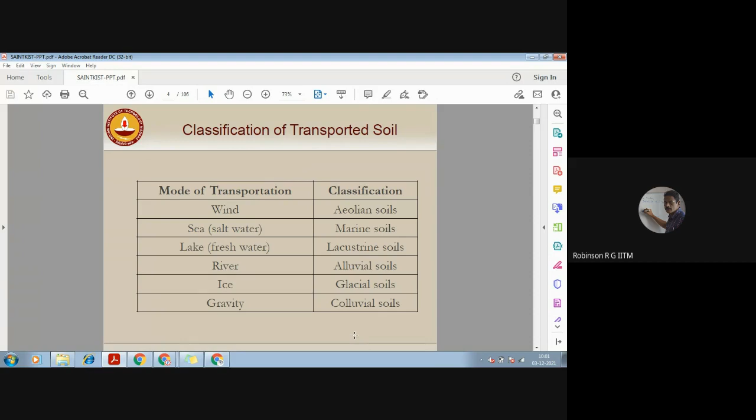Some soil deposits in India: the alluvial deposits near the river area, we get alluvial deposits. Then the laterites - I think people in Kerala will definitely know what it is. It is extensively used for construction purposes right from the past.

Then we have marine deposits. A typical example is the Cochin marine clay, a typical example of marine deposits in Kerala. Then we have aeolian deposits in the desert region, Rajasthan and other areas.

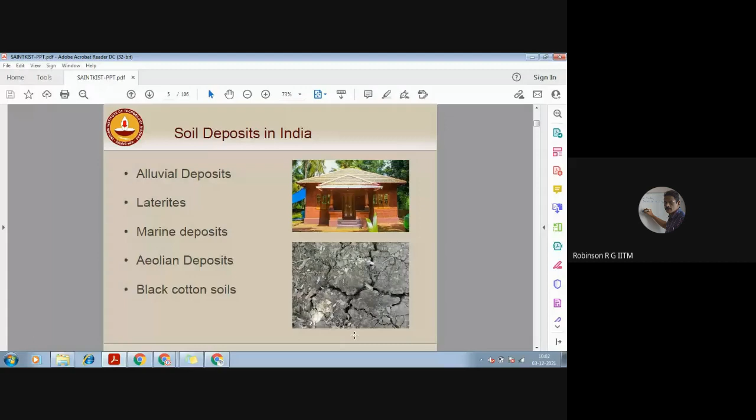We have aeolian deposits. Then you have the black cotton soil. It's a highly expansive soil. It creates a lot of problems when we construct lightly loaded structures.

Next slide. Yeah, some of the soils will not behave the way we want. We call them problematic soils. The examples are expansive soils, collapsible soils, soft clays, sensitive clays, etc.

The civil engineer uses soil as a foundation to support structures and embankments. First we do the site investigation, and if the competent soil is at a shallow depth, we go for shallow foundation. If it is at a deeper depth, we go for deep foundations.

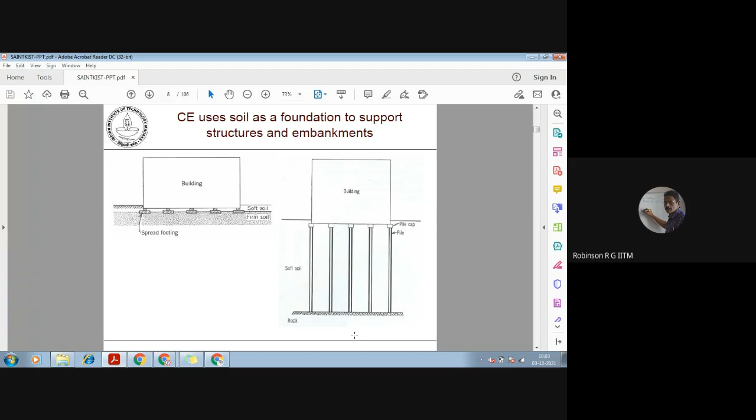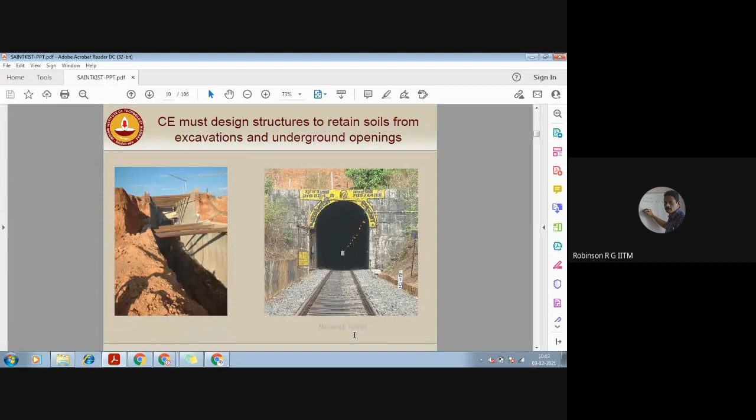Then we use soil as a construction material. The engineer should design structures to retain soil from excavations and underground openings, etc.

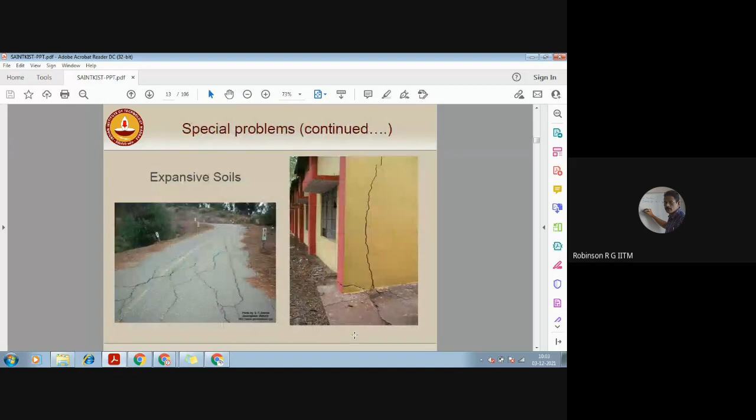They encounter soil in several special problems as well. A typical example is a liquefaction failure. Piping is another example. Expansive soils. Subsidence and collapse.

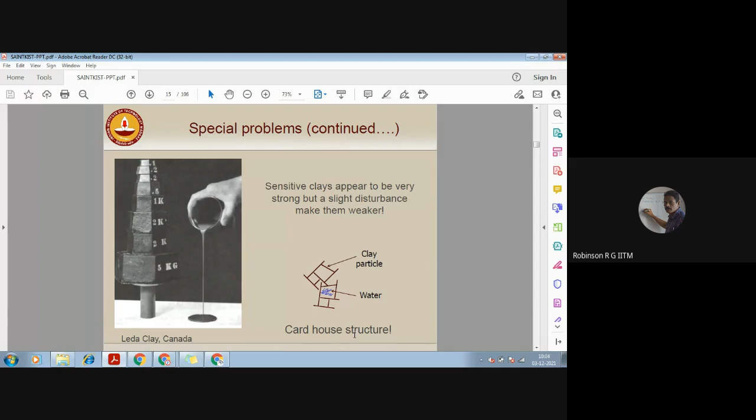Sensitive clays is another example. So we have different soil deposits. Some are problematic, some are good soils. Whatever it is, we have to design structures. How to go about the design, we will see.

If you want to design a foundation, we ask many questions. The design is all about asking questions and giving the answer. The first question is, what is the depth? Does it require support during excavation? Does it require lowering the water table? Is there a danger of damage to the adjacent buildings? How much will the completed building settle during its service time? These are some of the questions we ask and have to answer.

If it is an earth dam, we also ask several questions. Will there be any seeping? If it seeps, what is the seepage rate? What about the slope stability? What about the settlement and piping? All other issues we ask and try to answer.

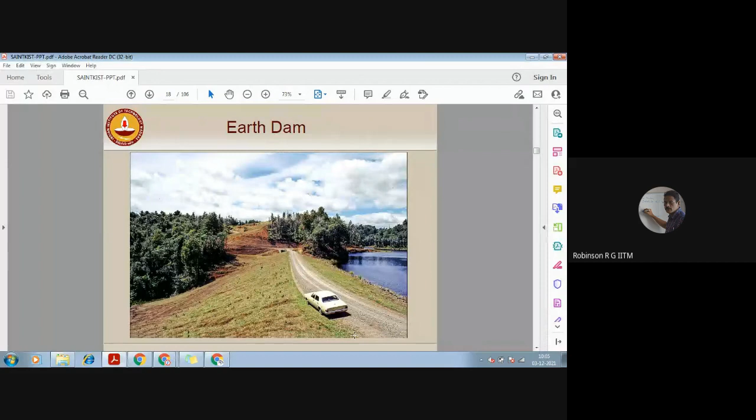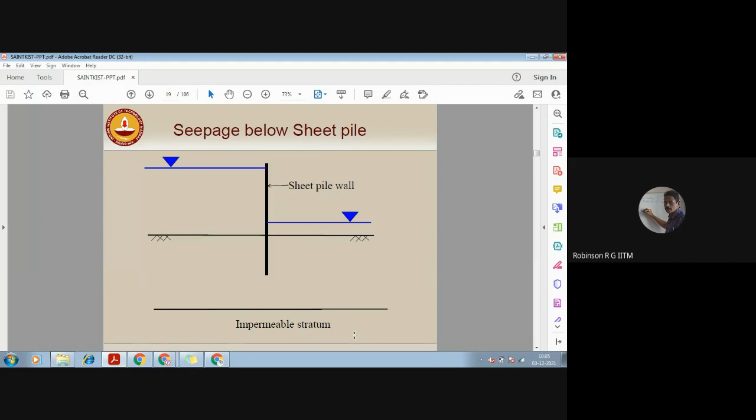Now, how to go about the solutions to geotechnical engineering problems. For example, the seepage problem we will look at.

By the time we call it a seepage problem, immediately the thing that comes to our mind is flow net. So we draw a series of flow nets with equipotential lines and flow lines. Once you know the flow net, we can do a lot of calculations - we can calculate the seepage loss, we can calculate the pressure. Everything can be done.

Now, the methods of solution to flow problems: we have different methods - analytical methods, numerical method, graphical method, analog methods, and flow models. In today's talk, we'll spend a little time on the flow models, the analytical method, and the numerical method. For flow models, what we do is reduce the scale of the field problem and do it in a laboratory scale - we'll elaborate on that a little more.

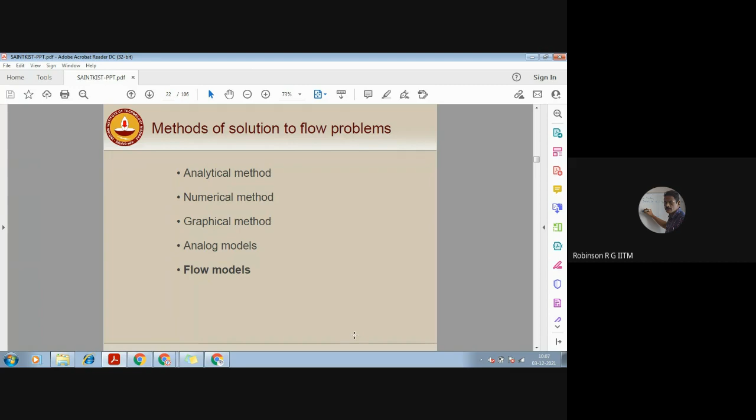This is typically a flow model. We are trying to simulate a flow model in the laboratory. The embankment may be a huge embankment, so to understand its behavior, we do a reduced scale model, bring it to the laboratory and make a model to try to find out the flow pattern. So typically, we construct a dam in a small scale model.

We inject an immiscible dye. This dye will flow along the flow line and we will be able to trace the flow lines. The equipotential lines, if you want to know, we can find out the pore pressure or the water head, then we can find out the equipotential line as well.

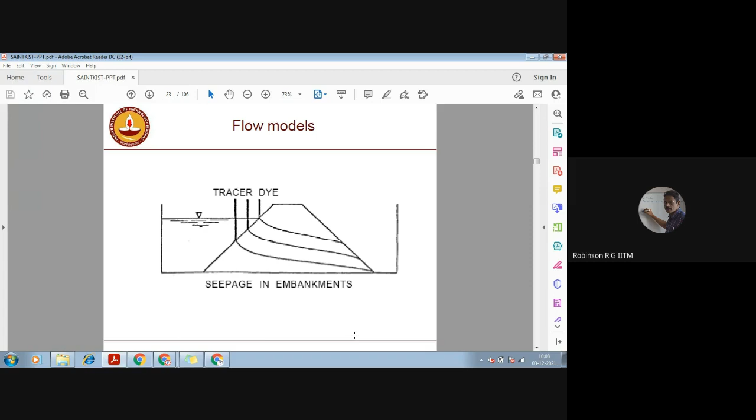This is an example of a flow model - you can very clearly see the flow lines in a sandy deposit. This is available in the Lambe and Whitman textbook. In the earlier days, before understanding the basic concepts thoroughly, people did laboratory models. It takes a very long time, but these models give confidence to us about how a flow line moves, how an equipotential line comes out, and we will also check whether the Laplace equation is valid.

This is another example, taken from Perloff and Baron. You can see a sheet pile with an excavation, and the water levels are shown there. The dotted line in red shows the water level, and the yellow line gives an equipotential line. The equipotential line is the line connecting points of equal head. You can very clearly see the equipotential line, and the flow lines are all shown here. By this laboratory model, we will be able to understand the flow patterns.

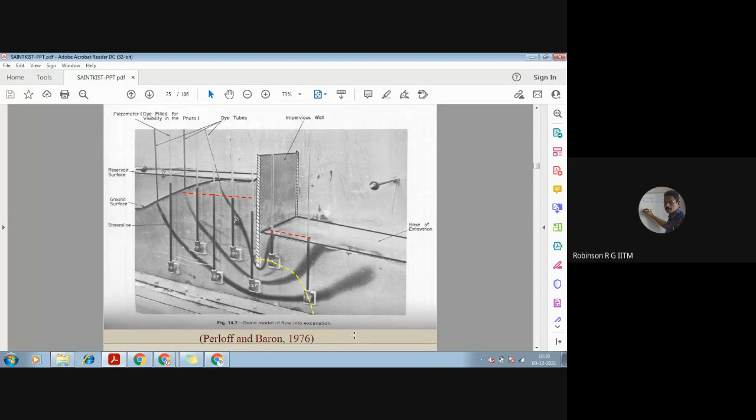So this is about physical modeling - a big prototype can be simulated in the laboratory, and we try to understand the overall behavior. Another example is the embankment in soft clay.

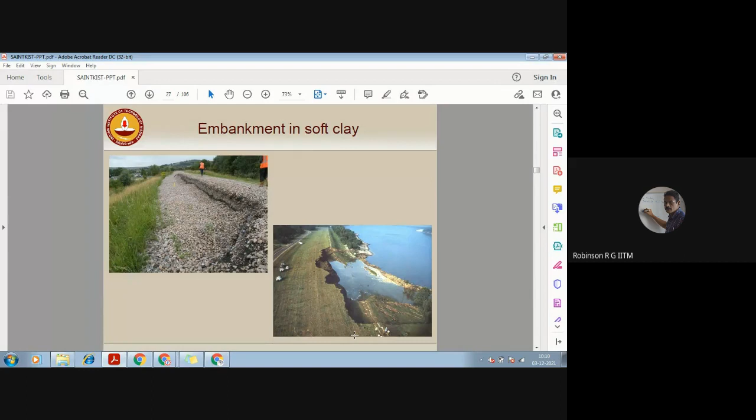Yeah, you can see the failure. So if you observe an embankment in a soft clay, it fails like this. So we can assume the failure plane as a part of a circle, and we can do the analysis.

Coming to the modeling, as I mentioned, we have two models: a physical model and a mathematical model. The physical model, I have already given you the example. For the mathematical modeling, the first thing we do is understand the failure plane and failure patterns through some means. Then once you know the plastic equilibrium of the whole mass, we apply a mathematical tool to get the factor of safety or the other design parameters.

What we need is an element test where we'll identify or determine all the soil parameters.

Then why should we do physical modeling? Ralph Peck said no theory can be considered satisfactory until it has been adequately checked by actual observations. Therefore, physical modeling is very much essential whenever we do a theory, because it has to be validated. The physical model can be in the laboratory scale, or it can be the full scale in the field. Whatever it is, we should have confidence with the physical measurements to validate a theory. Therefore, for a successful design or implementation in any field, both the theory and experiments should go hand in hand.

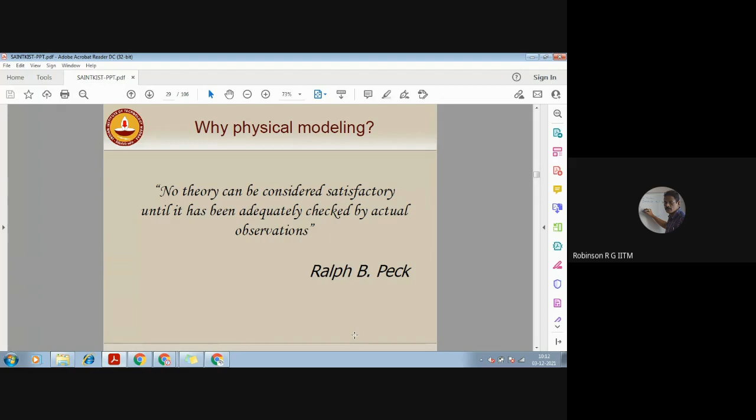Let's see what are the problems associated with 1G modeling.

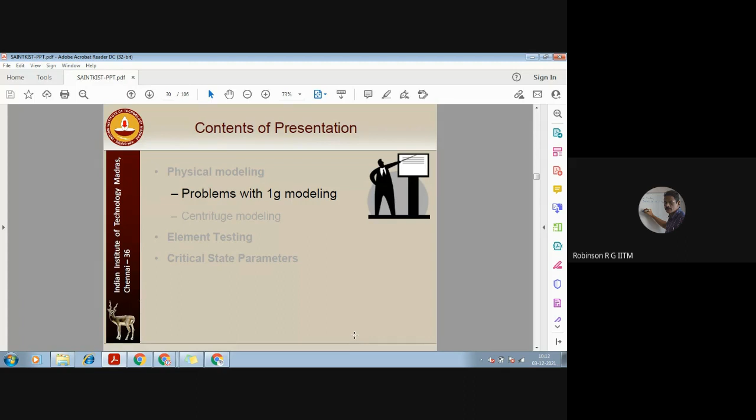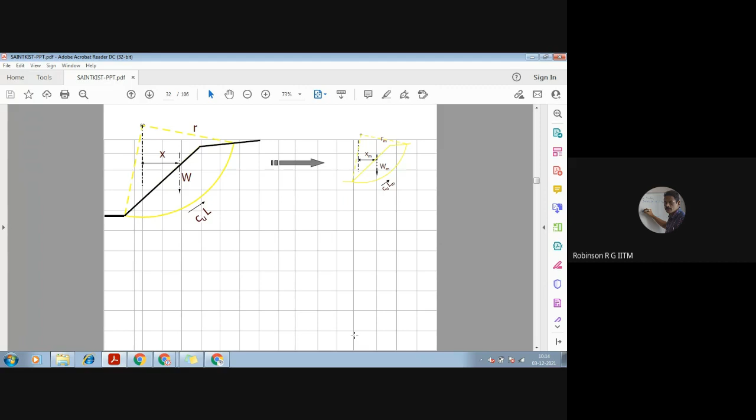That means the prototype that fails in the field will not fail in the laboratory. The reason is simple. This gives a clear reason why laboratory scale models have a problem. So we have a prototype in the field with a depth of 16 meters. Let's say the effective unit weight is 6.25 kilonewtons per meter cube. The effective overburden pressure, or the effective stress, increases with depth, and the stress at the bottom will be 100 kilopascals. The 16 into 6.25 will be 100.

Then the same thing if we have a model on the right side, we reduce the model by 50. Then the same way you can calculate the effective stress at the bottom, that will be only 2 kPa. That means in the field the stress is 100 kPa, but in the laboratory it is only 2 kPa. So this is the reason why a prototype, a field structure, fails, but if you reduce the scale and simulate in the laboratory, it won't fail because the stress levels are different.

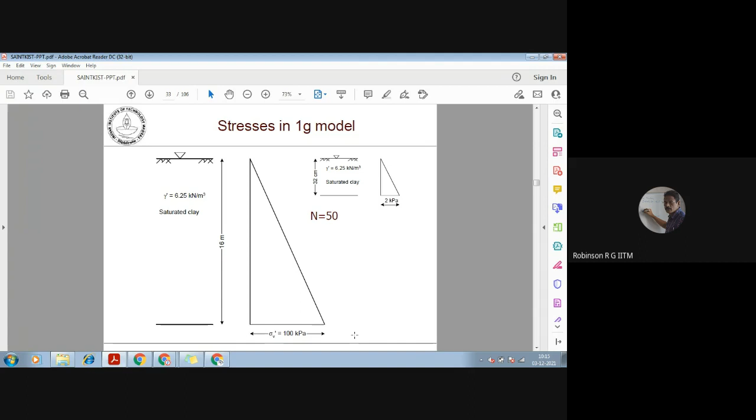The soil is so complicated that it is highly stress dependent. So therefore, if you want to have a proper scaling, you have to make sure that the scaling is properly taken care of. In the laboratory also, we have to make sure that the stress at the bottom is 100 kPa. How to do that?

We can do a centrifuge modeling. We can keep the soil specimen in the centrifuge, then by spinning it, artificial gravity can be simulated in the field, and that will cause the failure of the model in the laboratory.

So if we have a prototype of 16 meters in the field, then the effective stress at the bottom is 100 kPa. The same thing if we keep it in 1G, the stress at the bottom is only 2 kPa. But if we keep it in a centrifuge with a 50G level, meaning the acceleration is increased by 50, then the self-weight will cause the model such that the stress level at the bottom is 100 kilopascals. That way, the stress level can be clearly simulated.

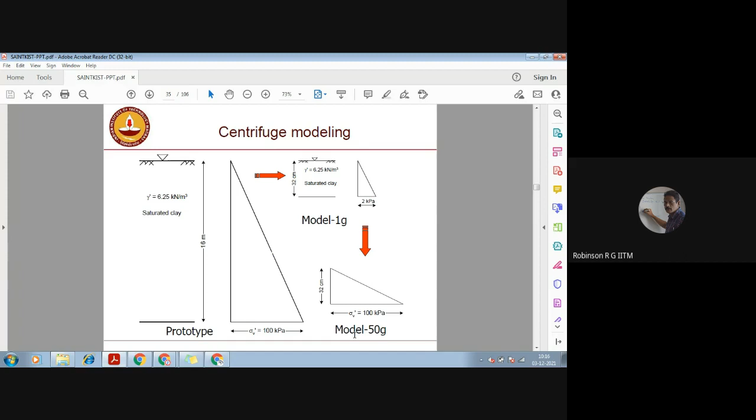We can also see how the effective stress varies with depth. In a typical clay bed, the effective stress increases with depth, therefore the water content decreases with depth. This can be very clearly simulated in the centrifuge.

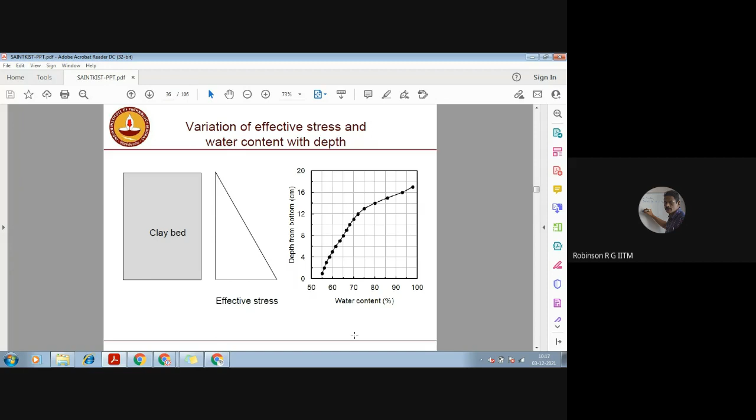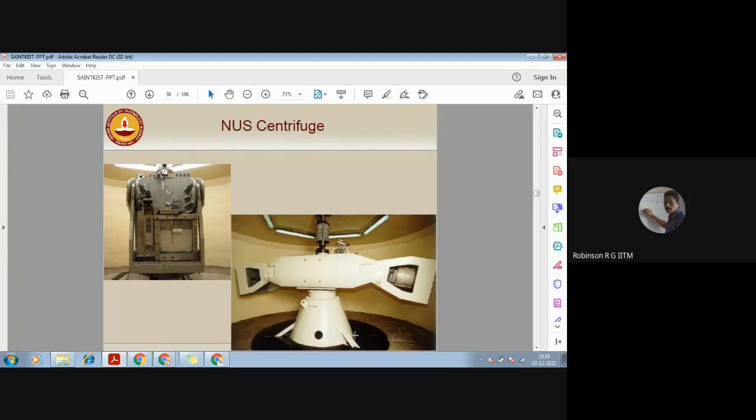This is the centrifuge. So I had a video, but I'm not able to play it. Let's see whether towards the end of this lecture, I will be able to do that.

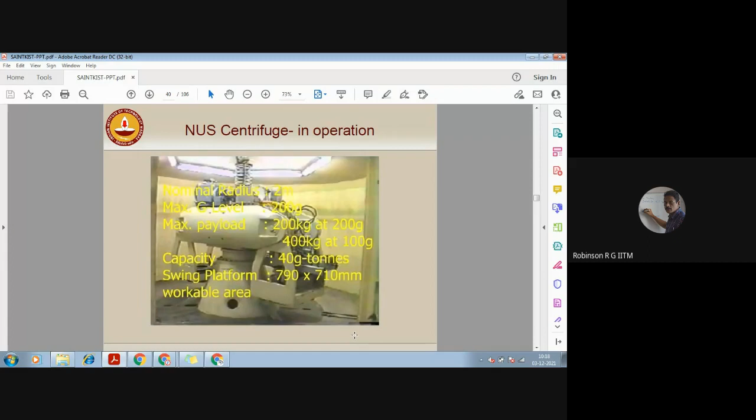The image shows the model in the laboratory.

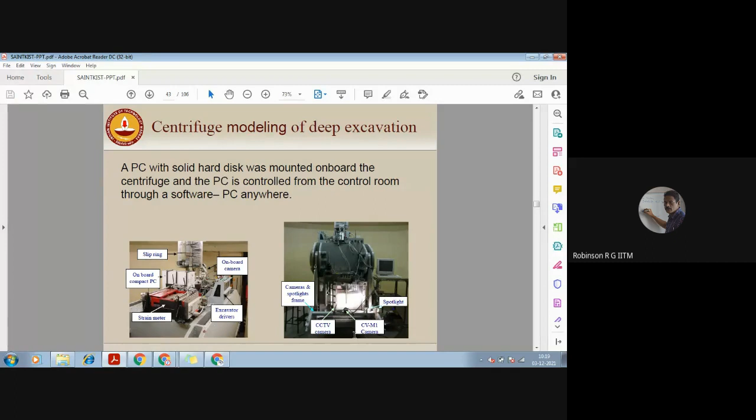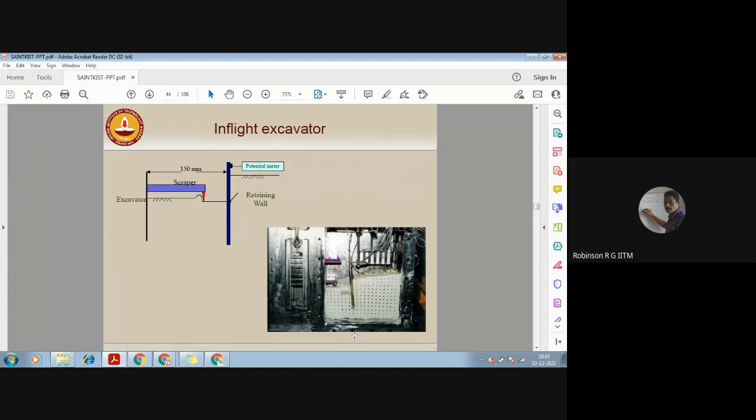You can see the scraper that works remotely, and as we excavate, you can see the model diaphragm wall moves out. That movement can be easily captured. So continuously run it.

So that way, during the process, we capture the movement and we can plot a graph of the distance

versus settlement and so on. So that way, it is possible to simulate the field condition in the laboratory, and we can run any type of test.

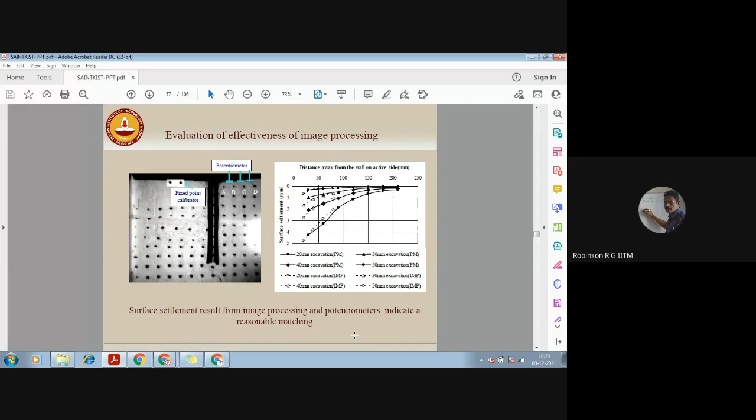We can track the movement of the particles, and we can plot the contours or whatever we want, the vector movement, everything can be done. Then one can do a finite element analysis and validate the finite element model.

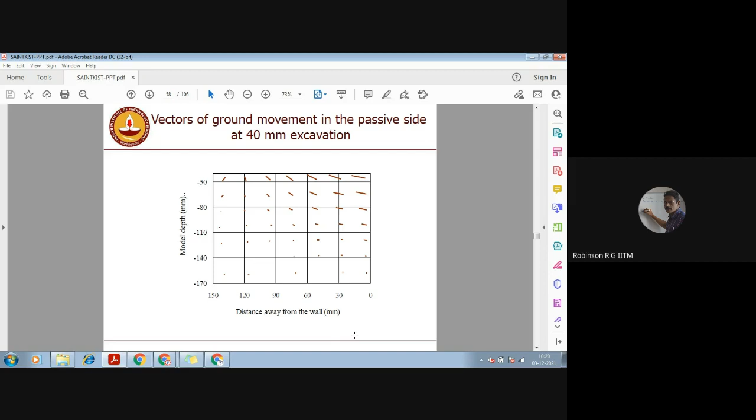This again, I had a video, I am not able to run it. The next part, I will talk about element testing.

As I mentioned, in element testing, we first identify the potential failure plane and try to take a soil specimen. Then we'll bring it to the laboratory and carry out the test.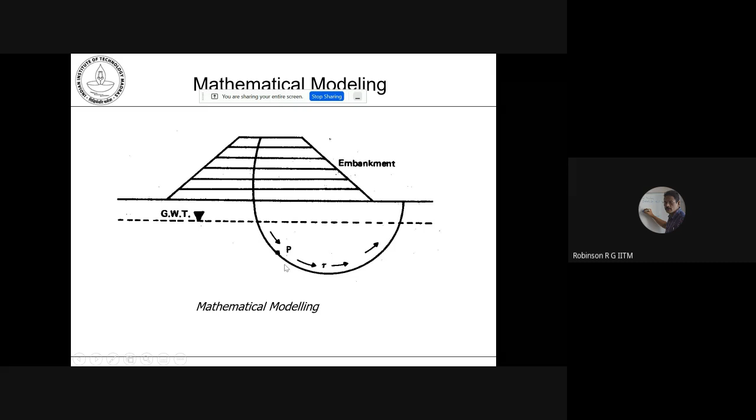So for that, what we do is we carry out element testing. A typical example is the same embankment problem. This is the failure plane. So to apply the mathematical model, we should understand the properties along these lines.

If you take a small element, the first element will be similar to a triaxial compression test. The one at the bottom here, this is close to a direct simple shear, or even close to a direct shear, because the failure plane is here. Then this will be similar to a triaxial extension test.

Therefore, for perfectly analyzing this problem, one should have the property of the element along this line under triaxial compression, triaxial extension, and direct simple shear. But for all practical purposes, we assume that it is the same, and we do any one of the tests.

So what I mentioned, the previous test is only the triaxial test, but in many situations, one has to understand the consolidation properties as well.

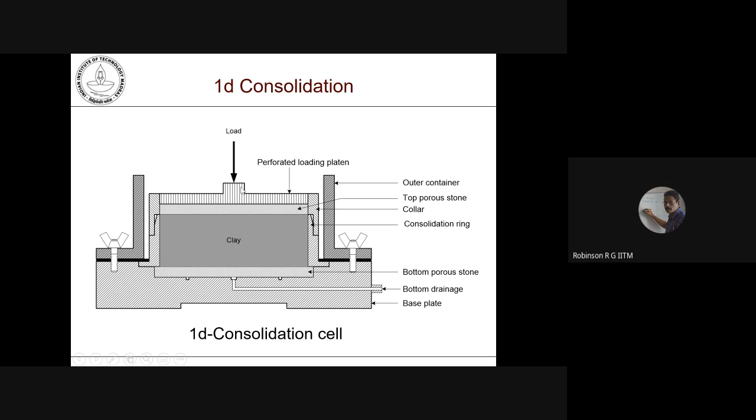Then we assemble this in a consolidation frame and apply the load in steps till the sample consolidates. That means the first step is we apply about 5 kilopascals, allow it for 24 hours. Then we increase the pressure to the next load, allow it again for 24 hours, increase the pressure again, allow it for 24 hours, and so on. Normally we will go up to about 800 kilopascals.

After reaching 800 kilopascals, we unload it in steps, again come back to 5 kilopascals. Normally for completing the test, we need about 10 to 14 days. During the process, we continuously monitor the time settlement data.

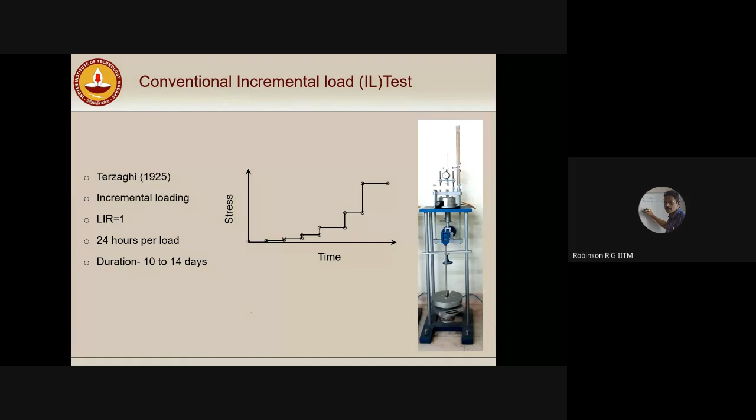So we have different types of consolidation apparatus. The one I showed in the previous slide is the conventional consolidation frame, which is much cheaper and has been extensively used for several years. But it has some limitations.

Then we have the hydraulic consolidation cell, also called a Rowe cell. Here, instead of applying the dead weight, we apply pressure through hydraulic means. The sample is placed here, and on top we keep a porous disc. Then we fill this portion with water and pressurize the chamber so that the pressure gets applied to the sample. So instead of applying a dead weight or other means, we use hydraulic pressure.

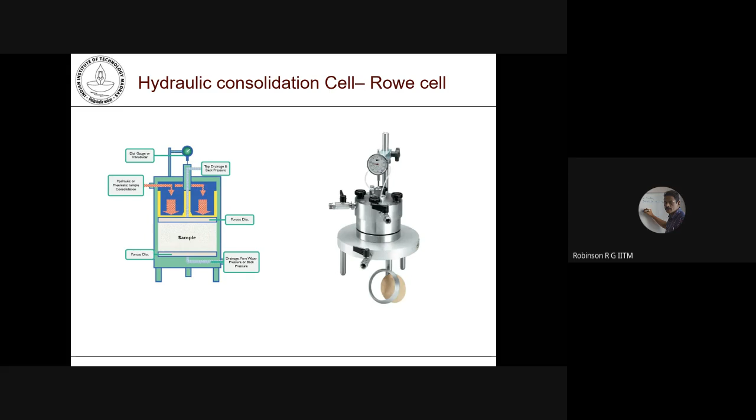That's why it's called a hydraulic consolidation cell. The main advantage is we can saturate the sample by back pressure saturation, and also perform permeability tests, radial consolidation tests, and so on. This is the Rowe cell available at IIT Madras.

One of the major advantages is that we can perform radial consolidation tests, either radially inward or radially outward. For the radially inward test, we make a small sand drain at the center, and the top and bottom are sealed. Once you apply the load, the water flows through to the center and comes out. This has a lot of applications in getting consolidation parameters under radial drainage.

That is essential for PVD designs. The test can also be conducted in the radially outward direction. Instead of keeping the sand column at the center, we provide a plastic drain on the side, then prepare the soil specimen and perform the test.

So the advantage of the Rowe cell is that we can apply saturation. Many things can be done, and we can also apply very high fluid pressure.

Typically, from a consolidation test, the parameters we normally determine are the coefficient of consolidation CV, the coefficient of secondary compression C alpha from the time settlement data, and from the void ratio log curve we calculate the compression index CC, the pre-consolidation pressure, and CR, the recompression index or swelling index. These are the usual parameters determined from a typical one-dimensional consolidation test.

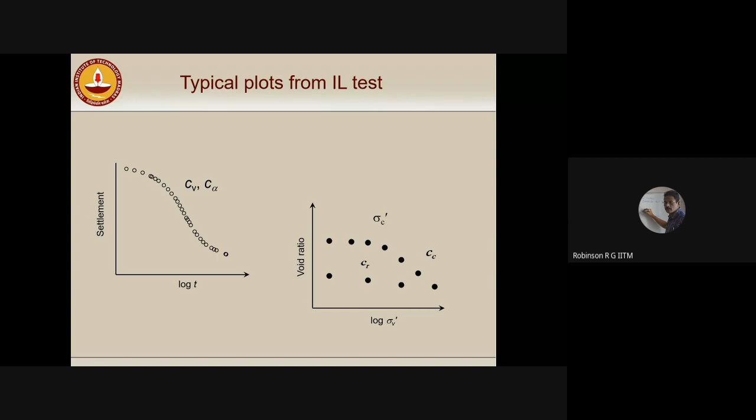The main advantage of the one-dimensional consolidation test is that the apparatus has been used for several years, maybe 100 years, right from Terzaghi's first theory. It is extensively used, the protocols are well defined, and the parameters are highly reliable. But the main limitation is that it takes a very long time to perform the test. Therefore, attempts were made in the literature to reduce the test duration.

The first test they developed is the CRS test, the constant rate of strain consolidation test. The next is the EOP test, the end of primary consolidation test. In this test, instead of allowing the sample to consolidate for 24 hours, we wait till primary consolidation is over, and once it is over, we apply the next load and get the data.

But the EOP test also takes very long, a few days. Therefore, people attempted rapid consolidation tests, one by Professor Sridharan with his rectangular hyperbola method. At IIT Madras, we developed another method, the root t method, as a rapid consolidation test. We all know the root t method is used for determining the coefficient of consolidation CV, but the principle behind it can also be used for determining other parameters.

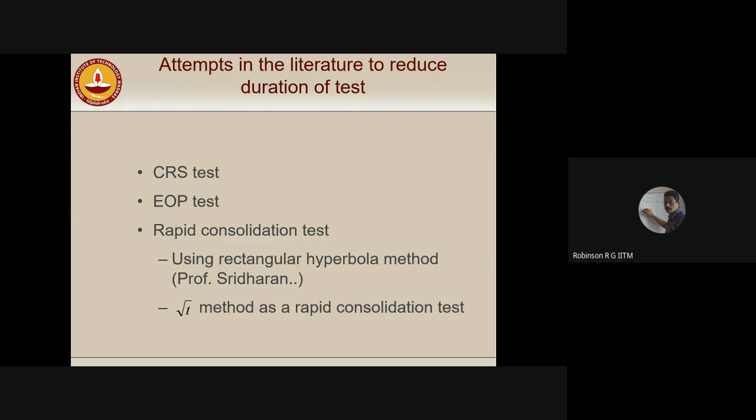Coming to the constant rate of strain consolidation test, this is a strain control test. The incremental load consolidation test is a stress control test, where we apply a constant load and get the deformation over a longer period of time. But in the CRS test, instead of stress control, we do a strain control test. We apply a known deformation, then measure the load.

This slide gives a comparison of the incremental load test and the CRS test. The incremental load test is a stress control test. The testing procedure is well established, with IS code 2720 part 15 and the ASTM codes given here. The test takes about 2 weeks to complete, and one of the other limitations is that the number of data points obtained is limited.

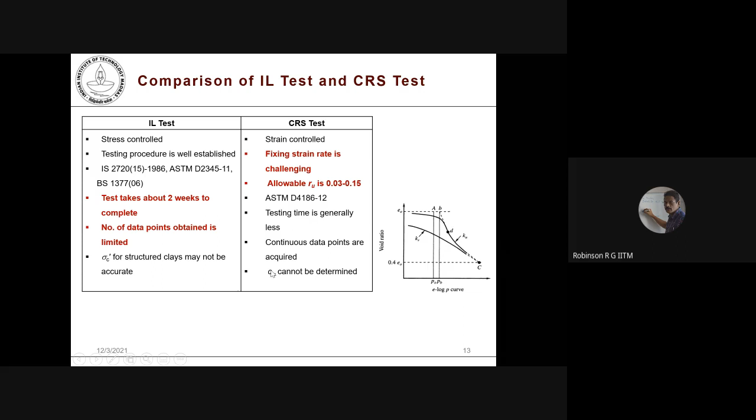So the CRS test is good. The CRS test gives a lot of data points continuously, like a continuous smooth curve one can get. But it has some challenges, like fixing the strain rate is a problem. The allowable pore pressure ratio is 3 to 15%, so that means we cannot do the test rapidly or slowly. We have to have a correct strain rate so that the pore pressure ratio remains within 3 to 15%. That's one challenge. Then the testing time is generally less, and the main advantage is continuous data points are possible to obtain. The other limitation is the C alpha, coefficient of secondary compression, cannot be obtained.

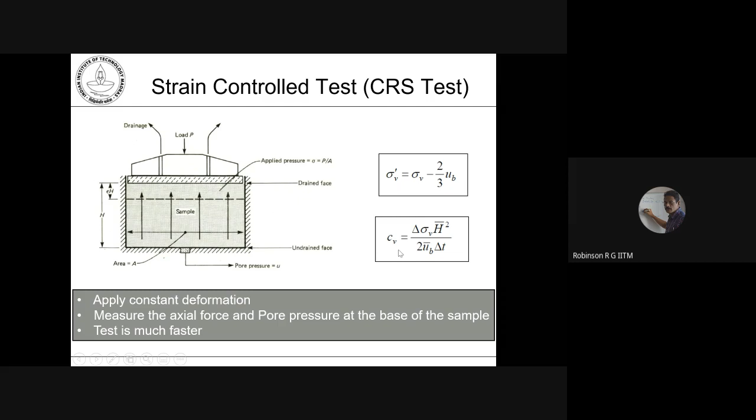So we calculate the average effective stress like this. We can also find out the coefficient of consolidation CV. In the stress control test, we get the time settlement data, then apply the root method or log T method to get the values. But in a strain control test, we use the pore pressure data at the bottom. If the permeability of the soil is very large, the pore pressure dissipation will be very rapid. So the pore pressure at the bottom will be higher for low permeable soils and lesser for high permeable soils. Using that, it's possible to get CV using this formula.

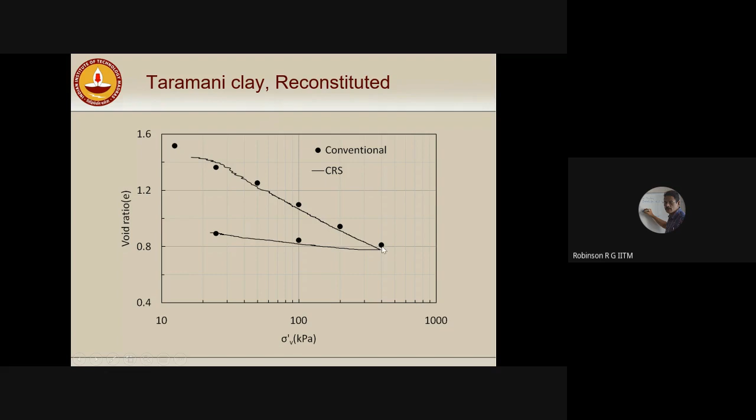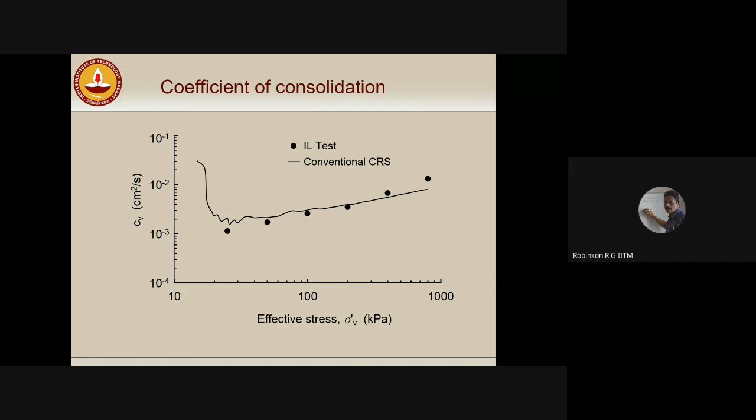That way, from the CRS test, it's possible to get all the consolidation parameters except the coefficient of secondary compression. The permeability also can be determined. The permeability values are more or less of the same order. There is some scatter, but...

The difference may be due to secondary compression and many other reasons. But for all practical purposes, one can consider this data reasonable.

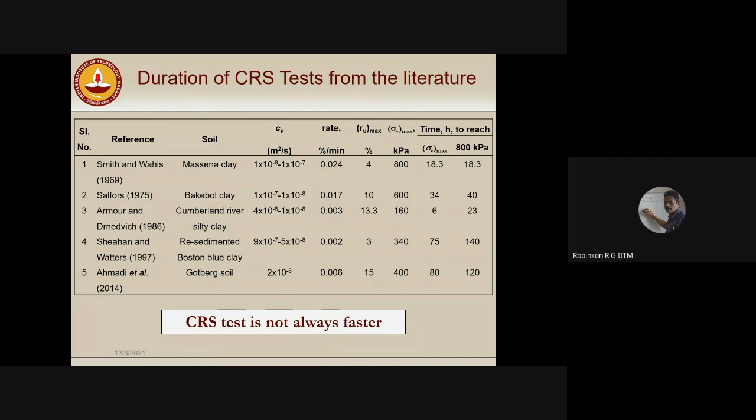Then we were wondering whether it's possible to do a rapid consolidation test. For that, we attempted the root method as a rapid consolidation test. The procedure I will explain.

So what we do is perform the incremental load consolidation test in the usual way. I collect the data points like this and continuously plot it, because the initial portion in the root will be a straight line.

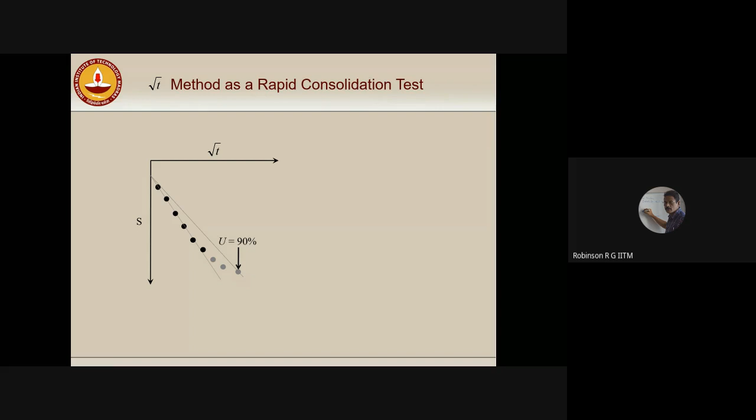So then, after reaching 90% degree of consolidation, we apply the next load. That means we are not waiting for the end of primary consolidation, but we apply the next load before the sample reaches 100% consolidation. So then we have to do the interpretation point.

The interpretation is again straightforward. If you apply Terzaghi's theory, as the primary consolidation is not fully over, there will be a little pore water pressure inside the sample. That can be predicted like this.

So this is the residual pore water pressure that was there inside the sample. Therefore, we have to correct the effective stress. The effective stress can be corrected using this formula, sigma v dash equal to sigma v minus 2/3 of um,

because this is a parabola, the average is 2/3 um. So um is the mid-plane pore water pressure, which we can use from the theory. So um equal to 0.157 u0. This is based on Terzaghi's one-dimensional consolidation.

So the difference between the conventional one-dimensional consolidation test and the rapid consolidation test is that in the conventional test, we keep the load on the specimen for 24 hours continuously. But in the rapid consolidation test, we do not allow for full consolidation, we allow only 90% of the consolidation, and afterwards we apply the corrections.

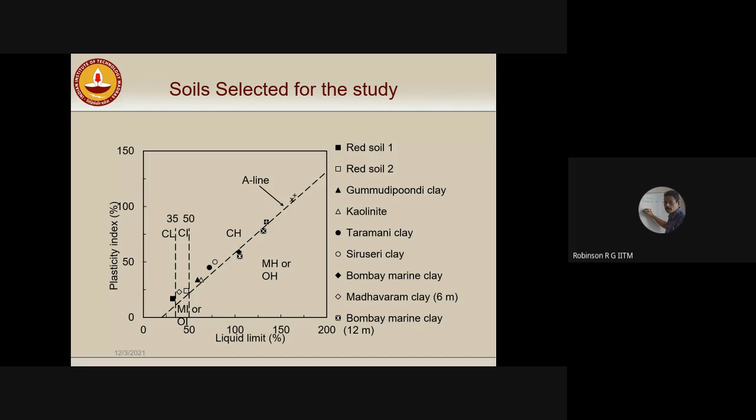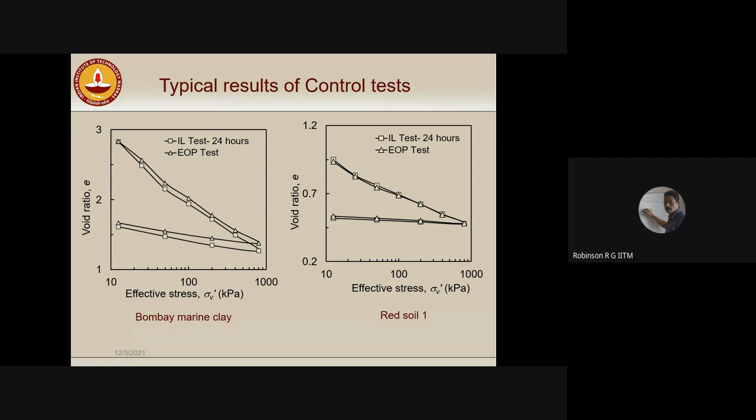So to validate the procedure, we did a lot of experiments, and the soil samples collected are all shown here. The specimen preparation is a routine preparation, and we also did some control tests. So these are the typical results.

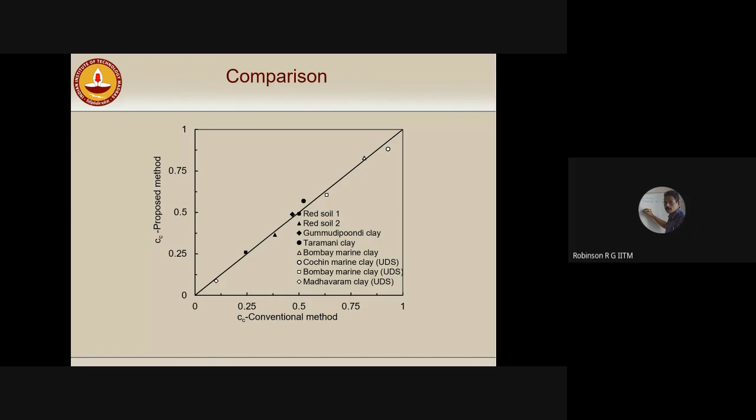We did the comparisons. The compression index values are shown here, and they are highly reasonable. Then the coefficient of consolidation CV values for many clays were determined, and they are also of the same order.

Then the pre-consolidation pressure values were obtained for quite a few clays. You can see the values are highly reasonable. For Cochin marine clay, undisturbed sample, the conventional test gives 85 kPa, the proposed method gives 90 kPa. For the other two, within about 10 to 20% we are able to get the pre-consolidation pressure.

So this way it saves very, very... it will save quite a lot of time. Performing a 10 days test, if you can shorten it within a day, is very, very good.

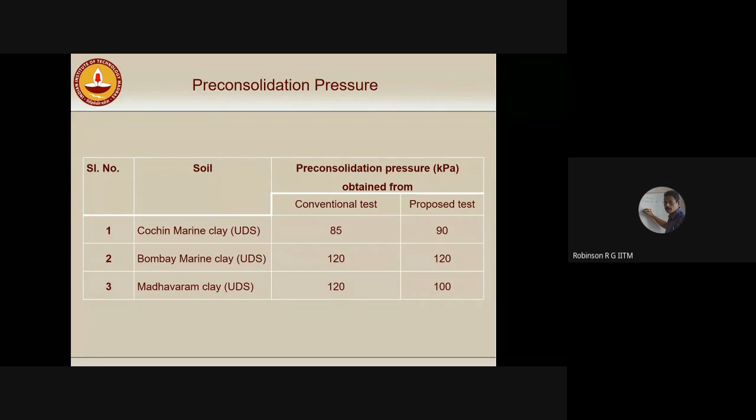So we have published this in the Indian Geotechnical Journal, so you can refer to it if you are more interested.

Within 8 hours, if you complete the test, that means morning you go to the lab, start the test, evening you finish it and go out of the lab. So we did this for many clays, and it is working quite well.

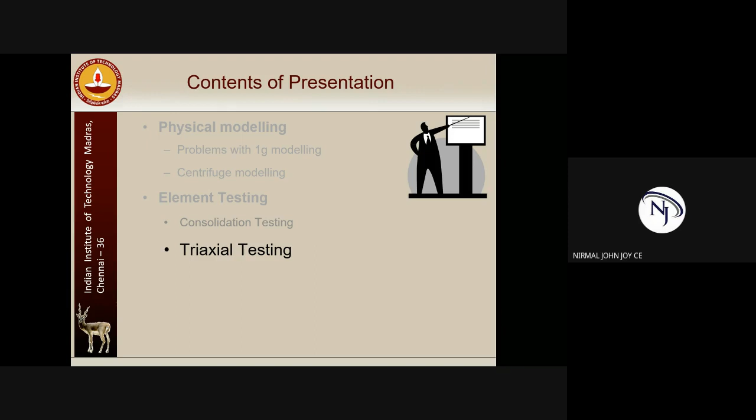Yeah, before going to triaxial test, in the element testing part, what we discussed is 3 types of tests. One is the conventional incremental loading consolidation test that takes about 10 days. Then the CRS test, that's a strain control test, that takes about 2 to 3 days. Then the rapid consolidation test using routine method, that takes just about 8 hours to complete. But the data we obtain from all these tests are quite the same.

Then comes the triaxial test. I'll take about 10 to 15 minutes. Hope this is okay, is that okay if I take 10 to 15 minutes? Because we lost some time in the morning. Yes sir, okay, thank you.

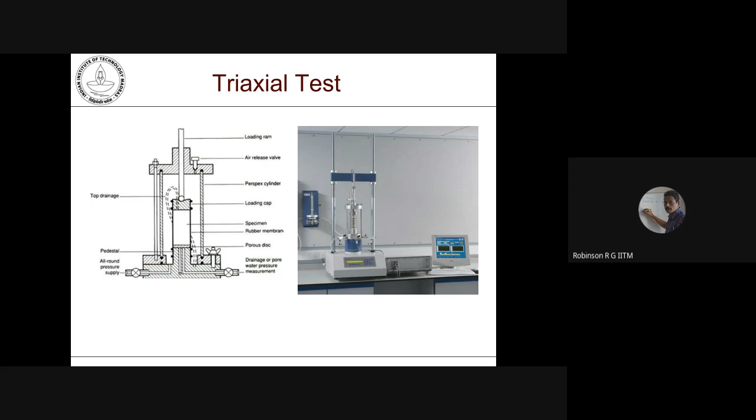Because triaxial test is also an important test, I think I will skip this. There are 3 types of triaxial test. There is unconsolidated undrained triaxial test, then we have consolidated undrained test, and the drained test.

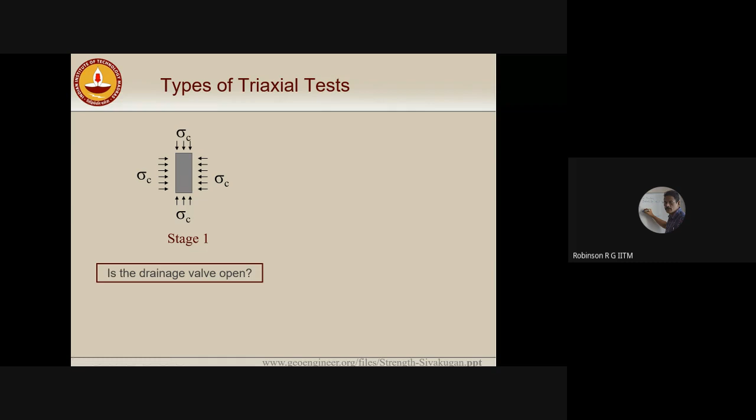So the triaxial test has 2 stages. The first stage is the consolidation stage. After assembling the soil sample, we apply all-round confining pressure. That's stage 1. In stage 1, we can have 2 conditions, whether the drainage valve is open or closed. If the drainage valve is open, we call it a consolidated sample. If the drainage valve is closed, it is an unconsolidated sample. So now in stage 1 itself, we have 2 types of conditions: consolidated sample and unconsolidated sample.

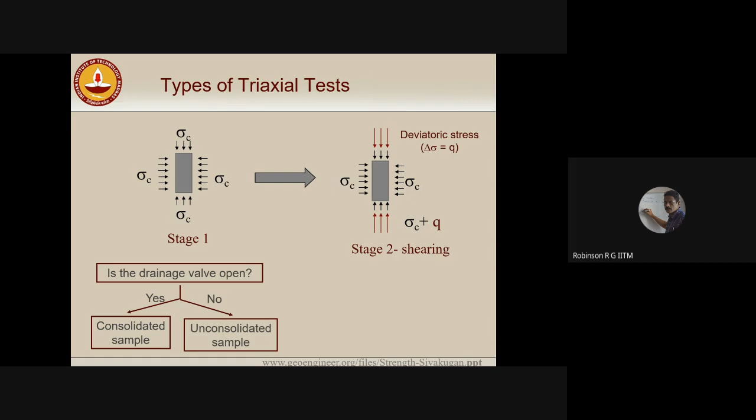Then the second stage is the shearing stage. We apply the deviator stress to cause the specimen to fail. Here also we'll check whether the valve is open or closed. If the valve is open, we call it drained loading. If the valve is not open, we call it undrained loading. So these are the 4 conditions we have in stage 1 and stage 2.

Now then we have the combinations, right? So if in both stages the valve is open, that means it is consolidated drained triaxial test, CD test. If in the first stage the valve is open, that means we allowed the sample to consolidate, and in the second stage we did not allow the sample to consolidate, then it is called consolidated undrained triaxial test. Then the next type of test is

unconsolidated undrained test. That means in this test, in both stages, we do not allow the drainage to take place. So I request you to understand this very clearly, because this is one of the very, very important things many practicing engineers miss, especially laboratory technicians miss it. They always get confused between UU test and CU test.

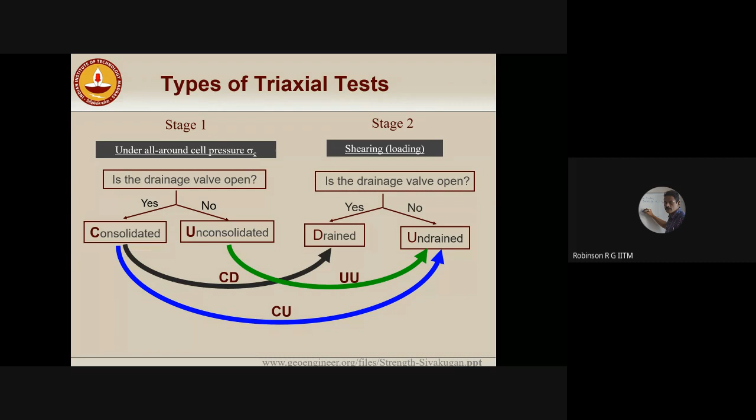Even the CD test, seldom they do, they get confused. Because in a UU test on saturated sample, we get phi equal to 0, and we'll get only cohesion. But in a CU test, we get for over-consolidated clays, both cohesion and internal friction. So if you see many reports, if it is done by not a professional technician, they mix up the things, then the analysis will be very difficult and design engineers will have a lot of problems. Okay, try to understand this clearly.

And some aspects, because I am not going into the details of this, one can do the test by back pressure saturation. Normally, to accelerate the consolidation, we provide side drains surrounding the clay, and the rate of shearing is another important parameter. The UU test, we do it within about 15 minutes. Then the CU test takes a little more time because we'll be measuring the pore water pressure. Finally, the CD test takes very, very long time to consolidate because we have to make sure that the pore pressure is 0 in a CD test. And to get the rate of shearing, we use the initial part of test data, that means the consolidation stage, we monitor time versus volume change.

From that, we calculate the rate of shearing, and using that, we'll determine the rates.

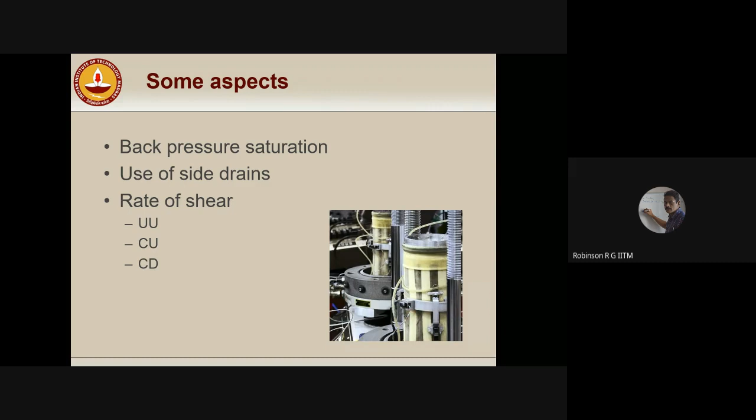For a regular triaxial test, we need 3 specimens to draw the Mohr circle. So you have to consolidate the sample 3 times, do saturation 3 times, and shearing 3 times. It takes a very long time. Usually each test takes about 2 days, so the total test duration will be about 6 days at least for most clays.

That is one issue. The second issue is if you are doing a field sample, getting 3 identical samples will be very, very difficult, because even within the same sampling tube there will be slight variation. Once there is variation, getting a clear Mohr circle will be difficult, and we may not get a tangential line properly.

So to overcome these issues, researchers came up with a multi-stage triaxial test. That means just one sample is enough to get 3 Mohr circles. I will briefly explain how to do that. The procedure is simple and straightforward.

The first stage, or initial phase, is very similar to conventional triaxial testing. We assemble the sample in the triaxial cell, apply the consolidation stress, and start shearing. We stop shearing just before the sample fails, so by the time the sample reaches about 3 to 5% strain, we stop the test, because in many cases about 3 to 4% strain itself reaches close to the ultimate strain. That means you need not shear the sample up to 20% strain.

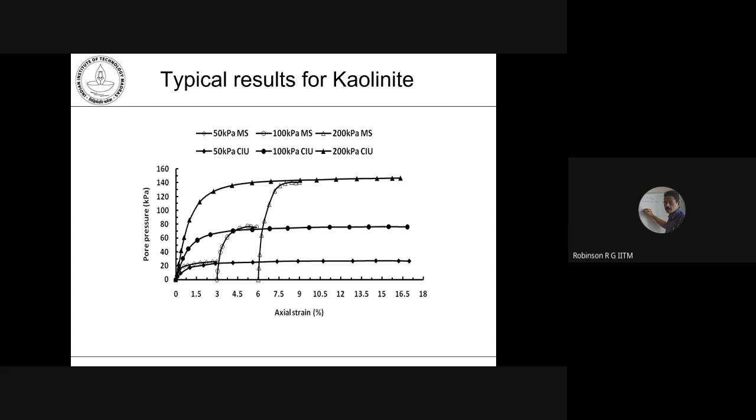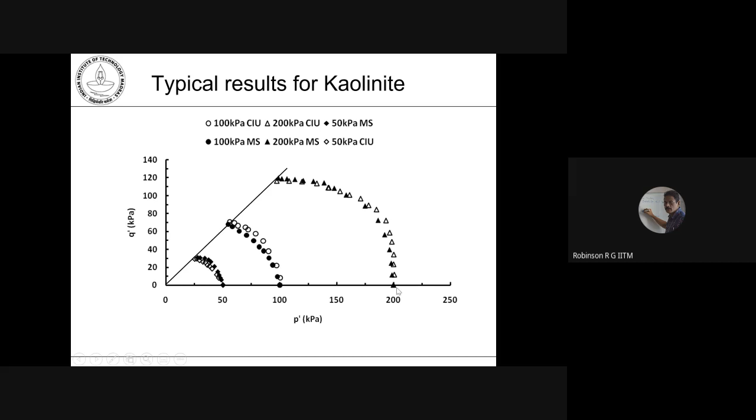Pore pressure data is also highly reasonable. Then we plotted the stress path, and you can see the data quite close together. The initial part is a little scattered, but overall the stress path is quite encouraging. Our students did this work, and you can see the data here.

This testing is okay for normally consolidated soil, but for over-consolidated soils there could be issues, because over-consolidated samples fail at very small strains. Researchers did test over-consolidated soil samples too, but one should be extremely careful to stop the test at each stage, because if a brittle failure plane develops afterward, the result will be in error. Nevertheless, the data is quite good.

So in this presentation, I talked about physical modeling. I could not explain the first part properly because of network issues. Sorry for that.

Then I highlighted the problems with 1G modeling. In 1G modeling, the main problem is that the self-weight stresses are not comparable to the field stresses. So to bring that stress similar to the prototype, we go for centrifuge modeling.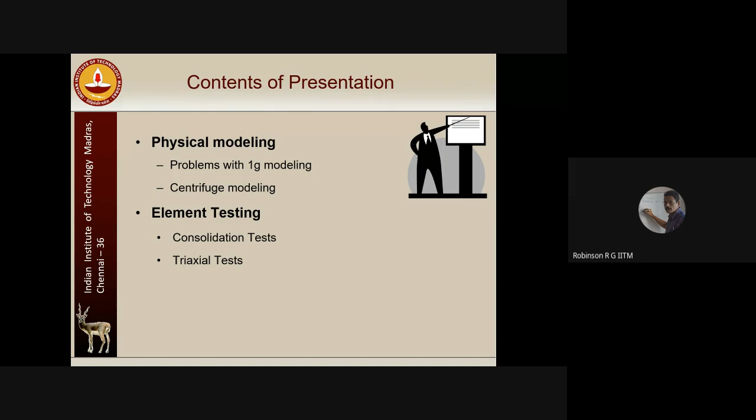In the centrifuge modeling technique, what we do is keep the test model in a centrifuge and spin it such that the stress levels in both the prototype and model are similar. Afterwards, we can do a lot of tests in the centrifuge itself, and the test can be conducted automatically. Then in the second phase, we discussed element testing.

So in element testing, we take an element of the soil, then apply stresses to simulate the field condition. Then we evaluate the soil parameters, which can be used for the mathematical model. Right, so that's about today's presentation.

We discussed the consolidation test, briefly covering three types: the conventional incremental load consolidation test, in which we keep the specimen for 24 hours under each load, taking about 10 days to complete. Then the CRS test, constant rate of strain consolidation test, which is faster but still takes time. The advantage of CRS is that we get a continuous e-log p curve, but in incremental load testing we only get discrete points.

We also discussed the routine method as a rapid consolidation testing procedure, so one can get the data within a day. We cannot get C alpha, the coefficient of secondary compression, but all other consolidation parameters can be obtained from these tests. Then we discussed the triaxial test.

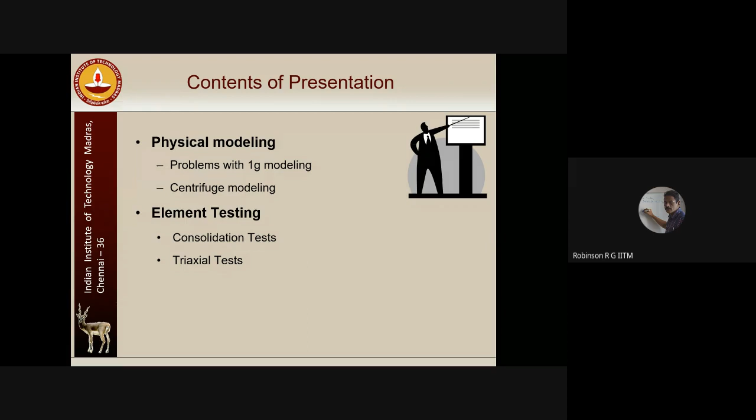In the conventional triaxial test, we do 3 samples, usually taking about a week, 6 days. But if fewer samples are available, it's possible to obtain the parameters by multi-stage triaxial testing using only one sample itself.

I have to acknowledge my students who did all the hard work. Rahina did a lot of work on the CRS test. Rakesh and Lini did some multi-stage triaxial testing.

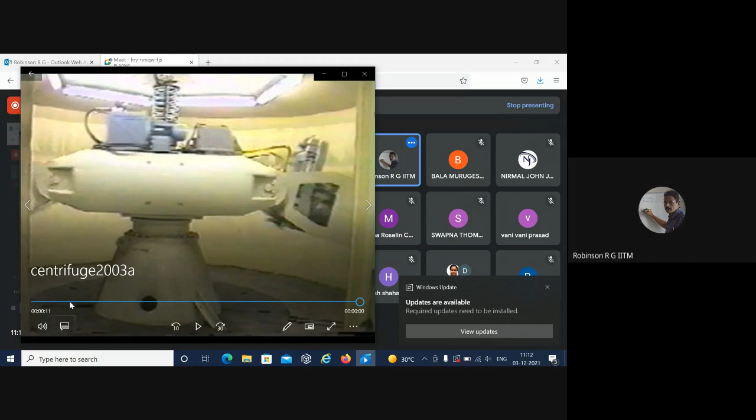Yeah, so this is the centrifuge running. The soil sample, the model, will be placed here, then it will be rotated in the centrifuge. I'll see one more.

Yeah, this is a tunnel interaction study, quite interesting. I will explain again. So the student wanted to study how the soil moves when a tunnel collapses, so for that they made a tunnel.

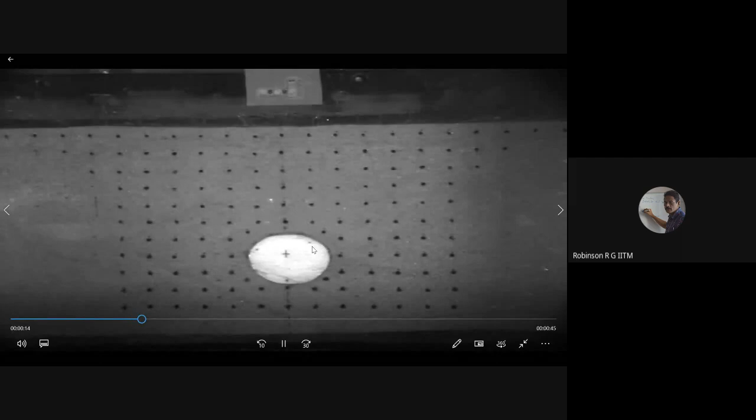This tunnel is made up of thermocol, then connected to an acetone tube. So when the centrifuge is running, the tube was opened and the acetone dissolves the thermocol. That is very similar to simulating a tunnel collapse. You can see the crater formation on the top.

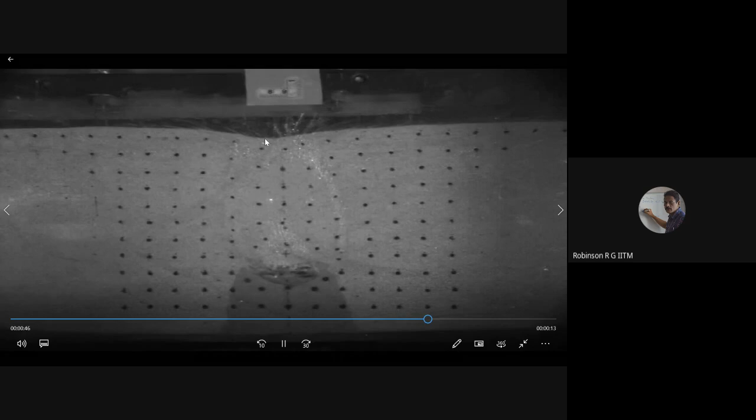See, very nicely it fails there. These beads were provided on the front side of the container, and one can take images and track the movement of those particles. You can see very clearly the zone of depression on top, and the movement of the soil throughout can be studied.

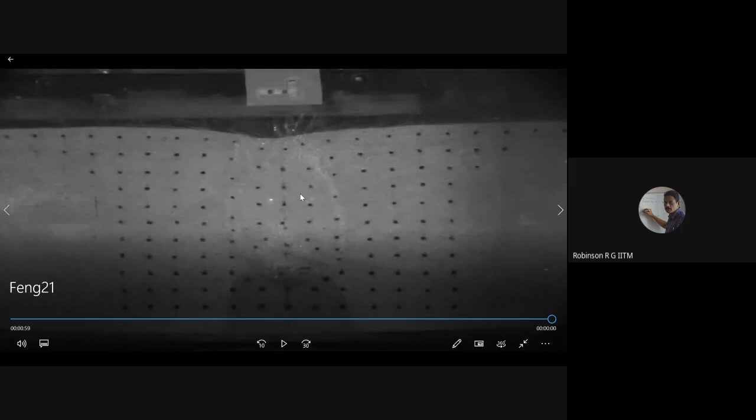So later, many students studied movement of piles due to tunnel collapse. What they do is keep some piles installed around, then allow the tunnel to collapse. The movement of the piles, the soil, and the bending moment on the piles can all be determined. So that's about the video I wanted to share with you.

So any questions? Participants, if you have any questions, you can raise it right now. I could see many of my friends - Anil is there, Balu, Anil sir is there, good morning sir, good morning, Balu is there, Veena is there.